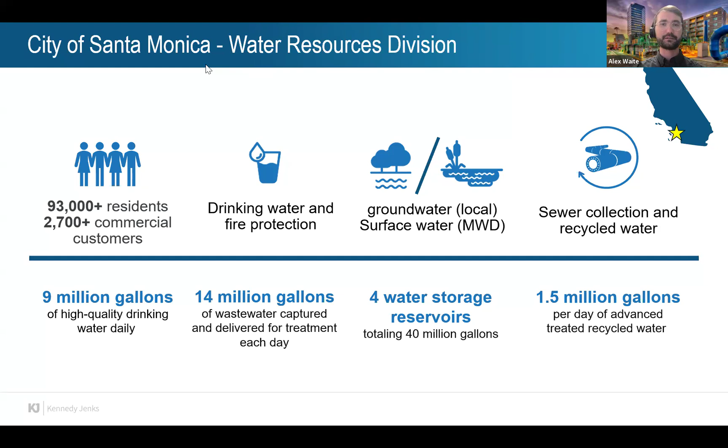The city of Santa Monica is a small coastal city about 9 square miles located in Southern California. We're surrounded on 3 sides by the city of Los Angeles and on the west side by the Pacific Ocean. The city serves about 93,000 residents, providing drinking water, wastewater, and recycled water services.

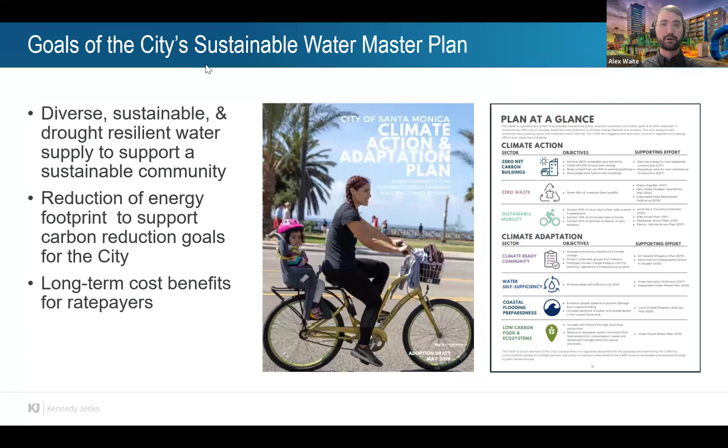Back in 2018, the city updated the Sustainable Water Master Plan to find ways for the city to become resilient and self-sufficient on local water supplies, and get off of imported and costly water supplies from the Colorado River and Northern California. Part of this master plan, we were able to identify ways to create a diverse and sustainable water supply to support the community of Santa Monica, reduce the energy footprint, and find long-term cost benefits for ratepayers.

For Santa Monica, we've been doing tertiary treatment on stormwater for non-potable sources, for unrestricted irrigation and indoor use. But now we've gone beyond that in some of the projects I'm talking about today to do groundwater replenishment. With regulations now complete in places like Colorado and California, we have drinking water regulations both for raw water augmentation and treated water augmentation. There are so many different pathways to utilize advanced treated recycled water for different applications, and that's what we were really investigating as part of this master plan: what's the best use for this water.

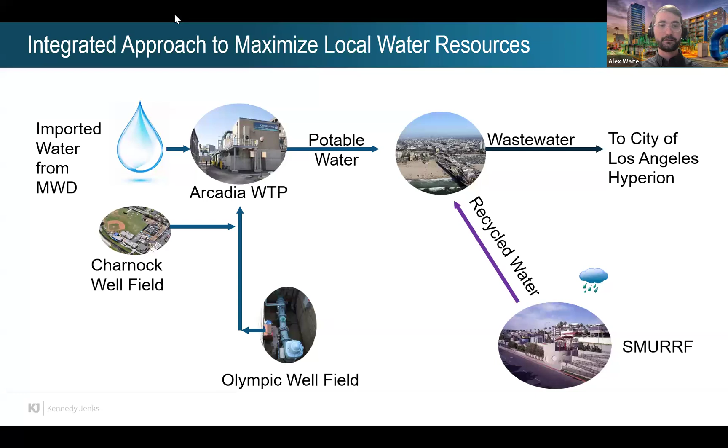As I mentioned, we did have a small amount of recycled water coming from our Santa Monica Urban Runoff Recycling Facility, or SMURRF. We also had local groundwater supplies from our 2 local well fields.

As part of the Sustainable Water Master Plan, we identified 3 different components of how the city could become self-sufficient on local water supplies. First and foremost is conservation, reducing the overall amount of potable water used. Component 2 is advanced treated recycled water, looking at how to utilize that water for both non-potable applications as well as for augmenting our local groundwater supply. Number 3 is how to become more efficient on our local groundwater supplies: remediating contaminated groundwater, as well as expanding the efficiency of our existing local groundwater treatment systems to produce more water from the same raw groundwater sources.

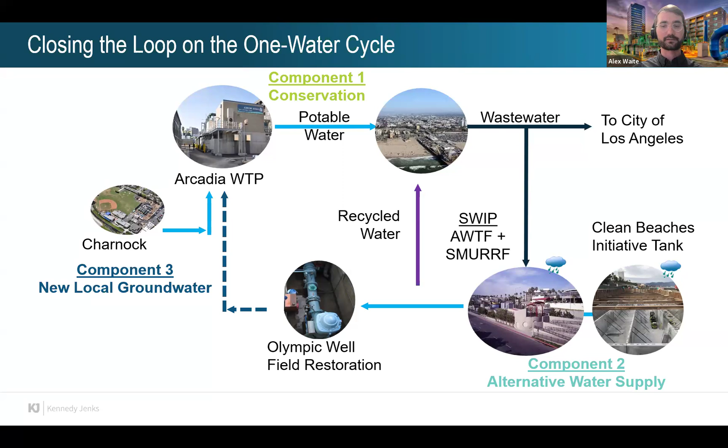On that second component, the alternative water supply, this is part of our sustainable water infrastructure projects. There were 2 facilities incorporated as part of this project: the advanced water treatment facility, as well as upgrades to the existing Santa Monica Urban Runoff Recycling Facility.

The AWTF is able to take 2 source waters: wastewater, as well as a blend of stormwater and urban runoff. Most of the time it can do 100% wastewater, and when there is stormwater available, it can take up to 30% of that stormwater supply. It runs that water through a full advanced treatment facility to bring it up to the Title 22 standards for the California Code of Regulations for groundwater augmentation.

For the SMURRF, it's able to take a blend of stormwater, urban runoff, as well as brackish groundwater, and runs it through an advanced treatment process consisting of reverse osmosis, creating what's called Title 22 diluent water under the California Code of Regulations. These 2 facilities together can produce 1.5 million gallons per day of advanced treated recycled water, both for irrigation, dual plumbing, as well as for groundwater recharge.

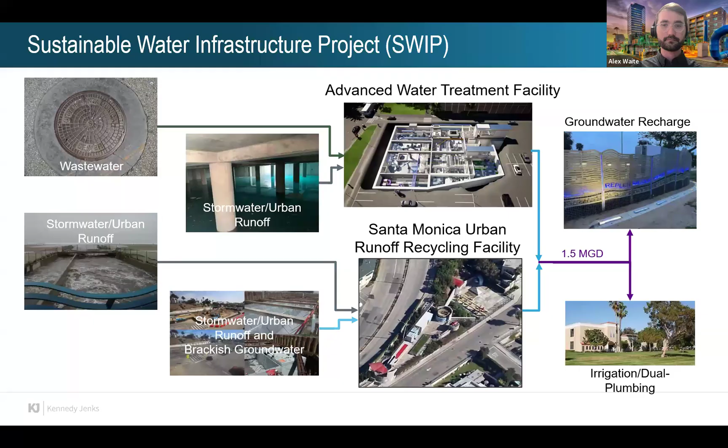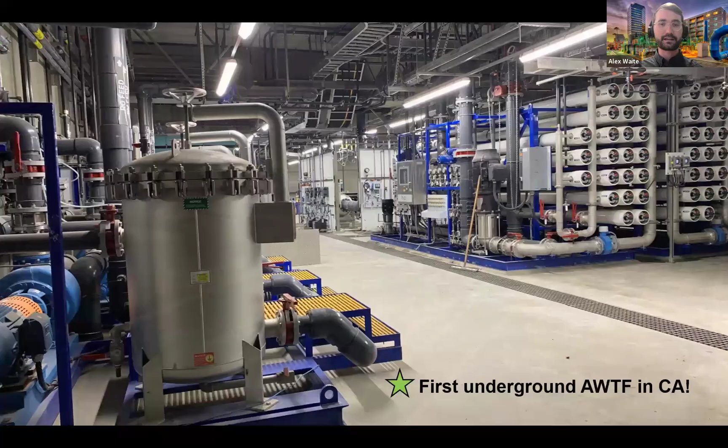But we ran into a challenge here with SWIP. We have the ability to create a lot of water, almost 1,700 acre feet per year of advanced treated recycled water supply. But our current use for non-potable is less than 100 acre feet per year currently. So we have a lot of supply left. So what do we do with all that supply? What are our options?

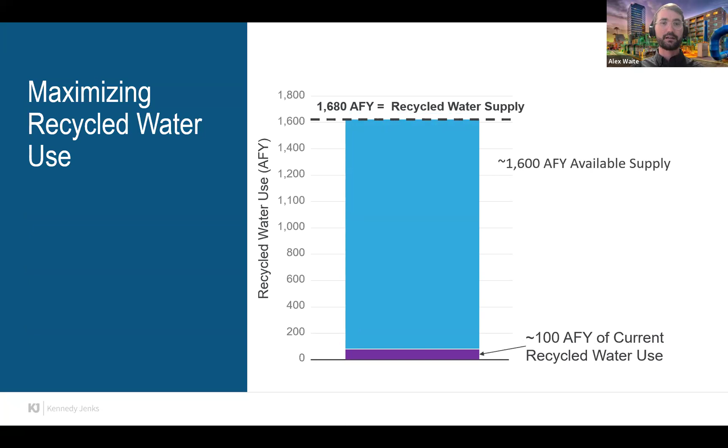Now there are additional administrative requirements for these non-potable systems. There's requirements for on-site supervisors, as well as additional documentation with LA County, as well as the Regional Water Quality Control Board and Division of Drinking Water. So the problem with this system is that new pipe equals more money. That's something we need to evaluate as part of this plan.

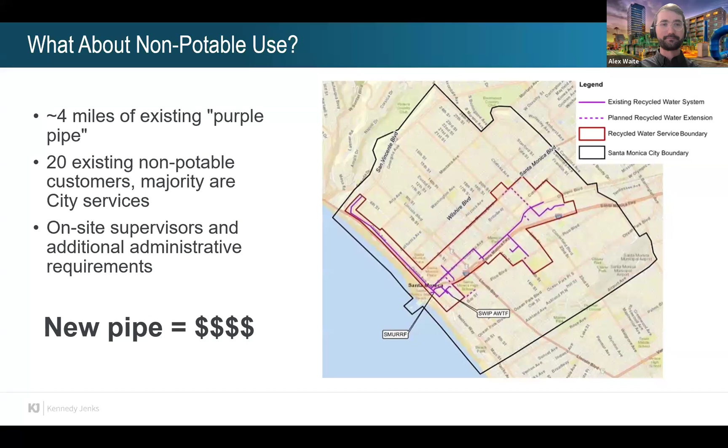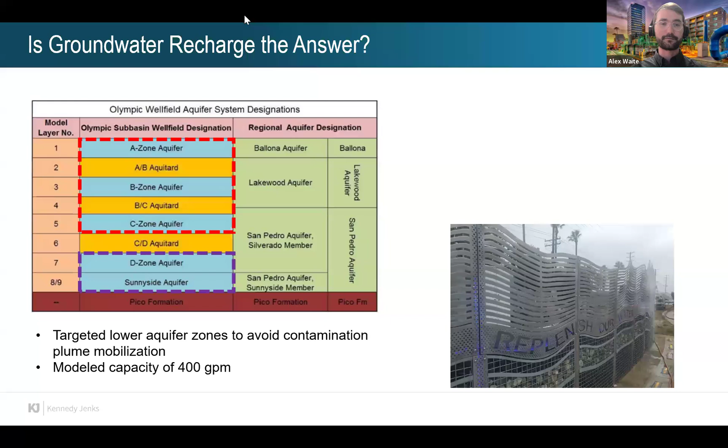In the modeling effort for this project, we modeled a capacity of 400 gallons per minute. Unfortunately, when we actually drilled the well and started doing injection testing, we found that the geology in this area actually creates a pinching effect. You can see it in the figure, where the aquifer zones are actually coming together towards the edge of the well field. This limited our available capacity in this area to about 200 GPM. Due to the separation requirements between a production well and a recharge well, we couldn't put the recharge wells any closer to the production wells. So that's a big challenge in order to put in more groundwater injection wells at this same capacity.

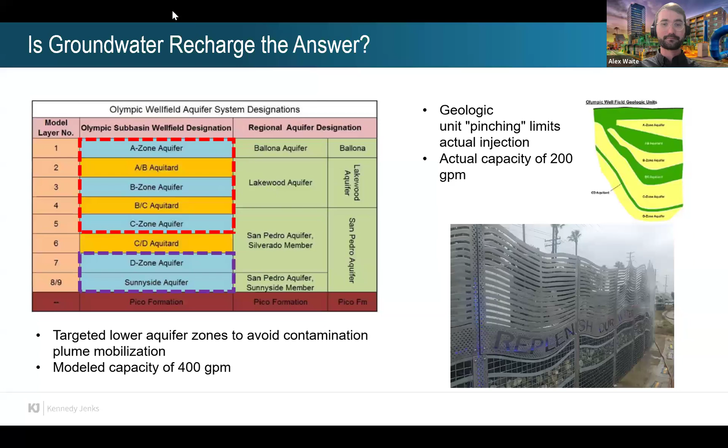So what does that mean? More money, right? Well, what about the last piece? What about direct potable reuse? Is that possible?

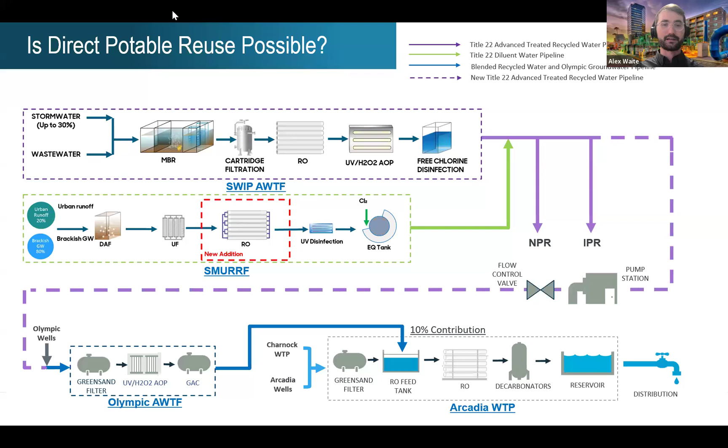So this is a schematic of a concept we've been working on in the city of Santa Monica of how to take all these pieces we have and put them together: the SWIP advanced water treatment facility, the SMURRF, also our drinking water system, so our new Olympic advanced water treatment facility, which consists of UVAOP and GAC, as well as our existing groundwater desalter facility, the Arcadia water treatment plant. Is there a way to put these pieces together with potentially a new pump station, maybe a flow control valve, perhaps additional treatment to meet the new DPR requirements that were approved by California in December of last year? So this is another opportunity we were looking at.

So why a master plan? Well, it's the plan for all these capital investments to utilize all the recycled water that's available, so no drops are wasted. Looking at that expansion of the non-potable system for those additional applications, expanding indirect potable reuse, seeing if the groundwater replenishment and more wells is feasible, and finally exploring the direct potable reuse opportunities.

So now I'm going to turn it over to Dawn to talk through the rest of the master plan effort.

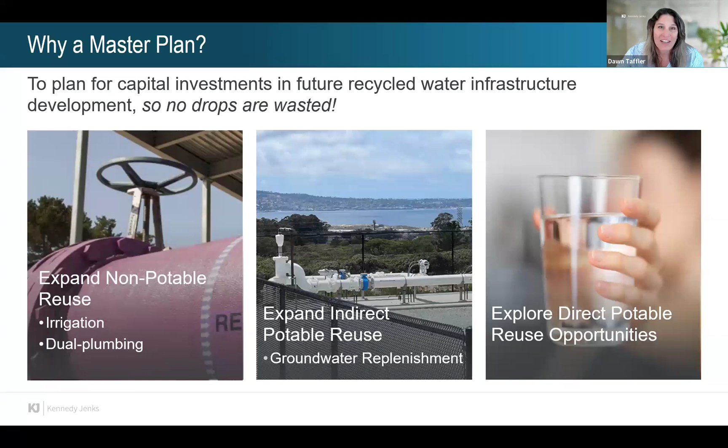Fantastic. Thanks, Alex. Alex really set the stage here of all the great work that the city has done. And it's a little bit different. Most master plans start out when cities and agencies don't have any infrastructure in place. They're starting to figure out what they're going to build so that they can start to meet these demands, or beneficially reuse their resource, or avoid discharging because of regulatory requirements. So this is a little backwards. It was a unique plan for us to work on in terms of recycled water master planning. So what this was really about was connecting the dots between the city's existing systems, the ones there, the ones under construction, and then the new facilities, all aimed at reducing the city's reliance on imported water supplies.

So as I started off saying, this is a roadmap to optimize the use of the city's resources in the best way, that 1,600 acre foot Alex mentioned, in a way that is cost effective, and also thinking about maybe some of the longer term regional opportunities.

So the overall approach is really a 4-step process. The first step sets the boundary conditions. You got to figure out really knowing what those available supplies are, not only on an annual basis, but if there's any variation, thinking about the reuse opportunities, the non-potable and potable, and what those demands are.

Then you got to think about the customers. Who is going to be the customers that we're really going to target? Where are we going to send this new conveyance? What's the best bang for our buck in sending it out there to meet the demands? Who are the priority customers? And then that comes back into cost effectiveness.

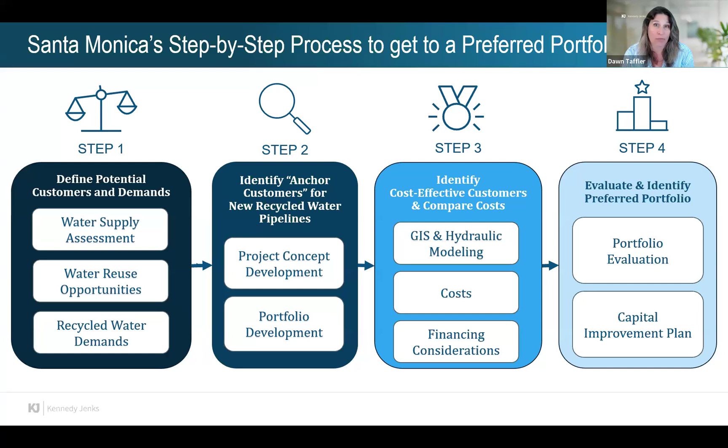And then finally, the last step was evaluating projects, putting together portfolios. There's not a lot of low-hanging fruit out there anymore. There's no one option that does everything. So it's really about looking at the best diversified portfolio supply and then creating a capital improvement plan so that the city can budget, seek grants and funding, and then have a plan to design and construct facilities.

So let's dive into the details of step one, defining potential customers and demands. So you saw that the map Alex first presented, that was the baseline system. Purple pipe in the middle is the existing system. The blue dots here show all the potential customers in the city for non-potable reuse.

A market assessment is basically just looking at, well, what's the market? Who can we sell this water to? And we really did this market assessment in two parts. This first part was this non-potable approach, looking at who would use the water for irrigation of landscapes, parks, maybe a golf course, a cemetery, but also dual plumbing for indoor use.

The city is really committed to reducing water demands into the future. And so new developments are being asked to do dual plumbing, which means a separate set of pipes inside the buildings to allow non-potable recycled water for flushing toilets and other non-potable uses. So that's only for future customers.

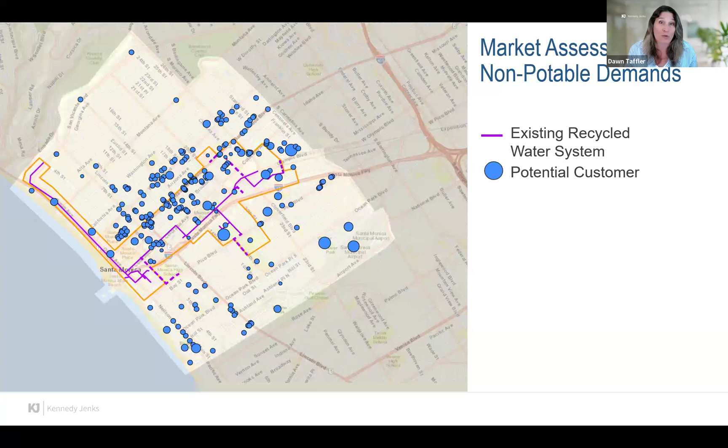So these blue dots represent all of those together. So there's a lot of dots. They're spread all over the place. I'm sure all of you are going back to that number of like, oh, that's a lot of cost if you're going to connect every single customer. So first we wanted to look at what are those demands so we could start to think about what are the best customers to connect.

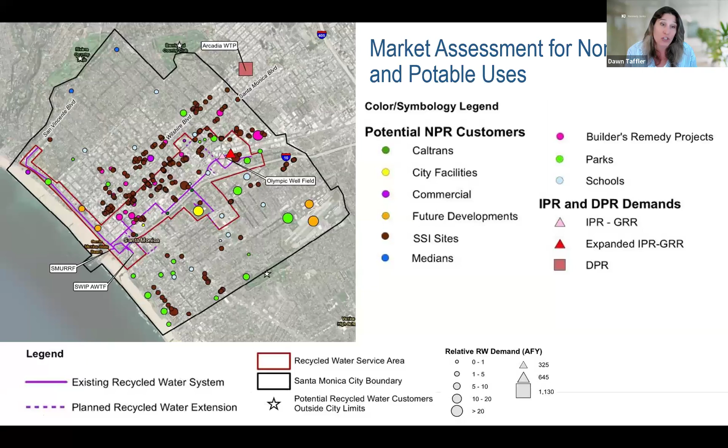And then direct potable reuse is just outside of the city boundaries. I know it's a small label there, but it's a big pinkish box that says Arcadia Water Treatment Plant. That's where the city already treats some groundwater coming out of their basin, and that is where the direct potable reuse water would be blended in. And then it could be distributed to all the customers that are connected to the city's potable water system.

So this is a figure that's showing all of the different potential demands. And what we're trying to see is, well, if we served everyone, do we have enough supply? And as the title indicates, this really revealed that the city is supply limited.

But just to walk through it a little, the gray bars at the bottom are the current customers. As Alex showed in that first slide, there's some customers hooked up receiving the water from the SMURRF, the stormwater project, but it's a very small demand, right? These are shown in monthly acre foot per month values. We started to add on top of that all of the different demands, starting with non-potable reuse.

The existing customers are parks that are already using water that we could just convert. The future customers include future developments, their irrigation, their dual plumbing. And then you get into the green bars, which are the groundwater replenishment, both the initial wells the city is planning, but also the potential to expand, and then direct potable reuse demands.

Now, the horizontal red line is important here because this is the maximum supply capacity the city will have when running all their new facilities at full capacity. That's 1,600 acre-feet a year, which Alex pointed to. We'll keep coming back to that.

And as is very clear, if you try to serve all of these demands, you're not going to have enough supply. You're going to have to figure out who gets what water, and there's no point in building a bunch of infrastructure they can't serve. So this really indicated the need to identify the best portfolio of customers, because you're not going to connect every single blue dot in the picture.

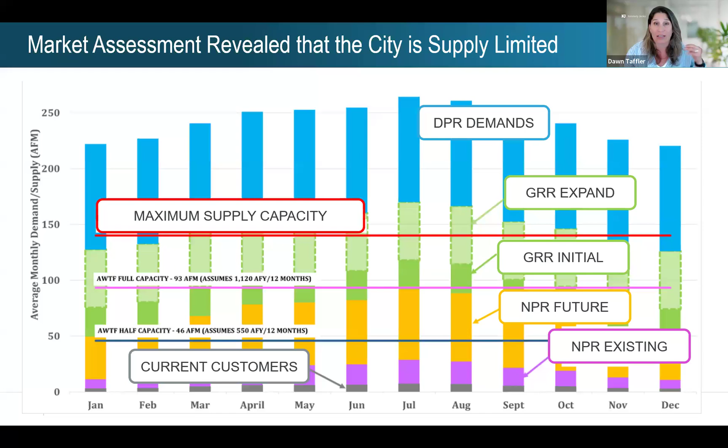So this leads into step two, getting into anchor customers. What's an anchor customer? An anchor customer is really the customer that's going to have the biggest priority. It's the biggest bang for your buck, maybe, or it's the most visible customer. So what the city really wanted to do is prioritize customers that are important to the city. Most of those were either parks and green spaces, shown by the green dots, or some of the bigger future developments.

There's one future development on the southeast side of the city at the Santa Monica Airport, which is going to go through a redevelopment phase in the next couple of decades. That's going to be an opportunity to create more demands and develop that park sustainably. So they wanted to think about it in the future, planning in a way that helps meet their other goals. These anchor customers really help define the geographic direction of expansion.

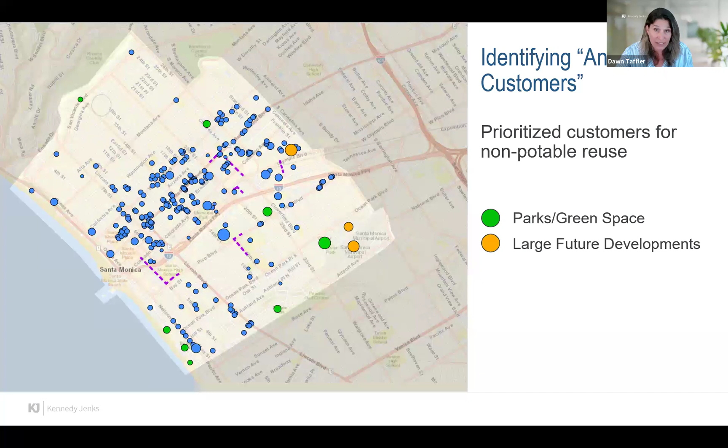So when we started to look at these anchor customers, we grouped them into different areas. Using a simple ABCD system, you can see there were five proposed backbone extensions, meaning the bigger pipe. The intent is to deliver water to these priority sites, and then think about what smaller customers we can serve along the way.

So we had a center, A, in the center of the city, which is where a lot of the new future developments would be. B is out where that airport is, with a few big parks. C is the lovely Santa Monica coastline, with some nice parks there. If you ever come visit the city, I highly recommend it.

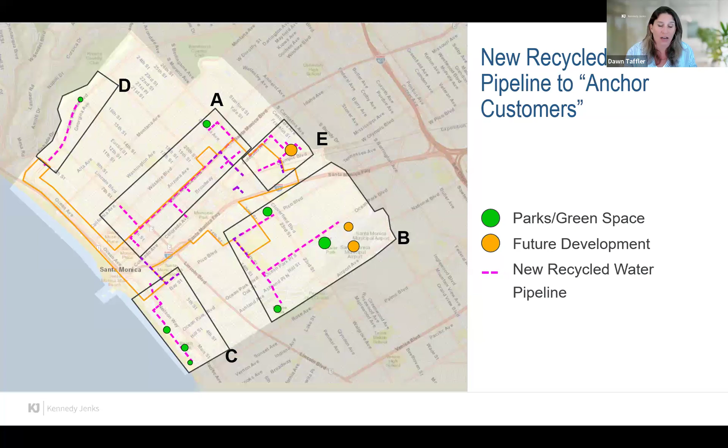D is a median used by a lot of city residents for running and biking along the path, so there's a small demand out there that the city was interested in serving. And then E is another big development that could come in the future with some demands.

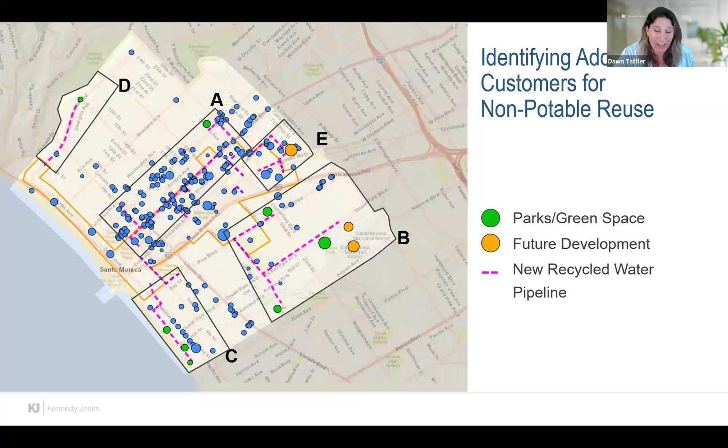So here's all the blue dots and how they fill into those areas. You can see A has a lot more potential for future buildings that will use recycled water, with less development in the outskirts. But all of this was taken into consideration, which really led to the need for a transparent, more quantitative approach to figure out how to decide what customers to connect.

So here we get into the radius of cost effectiveness approach, which we used to compare costs. Radius of cost effectiveness is essentially a way to quantify the distance at which a potential customer can be cost-effectively connected to a recycled water pipeline. It's a relative comparison looking at key parameters, using an equation focused on the customer's demand, since more demand is going to be a greater benefit to beneficial reuse.

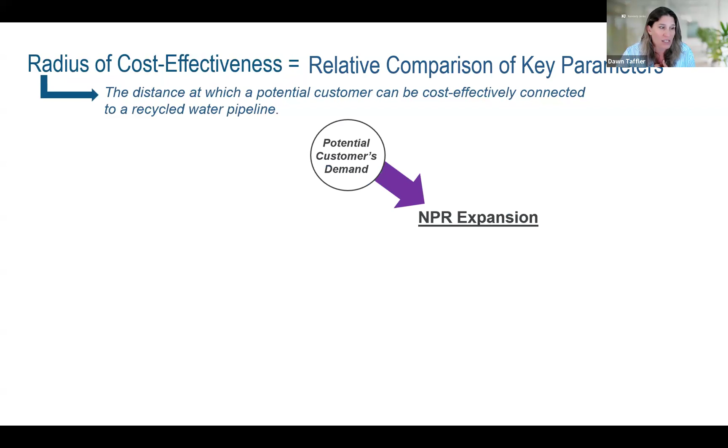We compared non-potable reuse expansion and DPR delivery. The idea is, does it make more sense to connect this customer with a purple pipeline that serves non-potable water specifically for non-potable reuse? Or does it make more sense to send that water to the direct potable reuse system, where it would get there eventually after going up to the Arcadia treatment plant and coming back into the drinking water distribution system?

So this is very unique. Not most cities would have the opportunity to look at these two different ways of serving a customer, and it is the same water, both of them very high quality.

So we compared a cost comparison. We looked at the demand and what the dollar per acre foot cost would be to send that water through direct potable reuse. There's some infrastructure associated with that, and then how it's delivered.

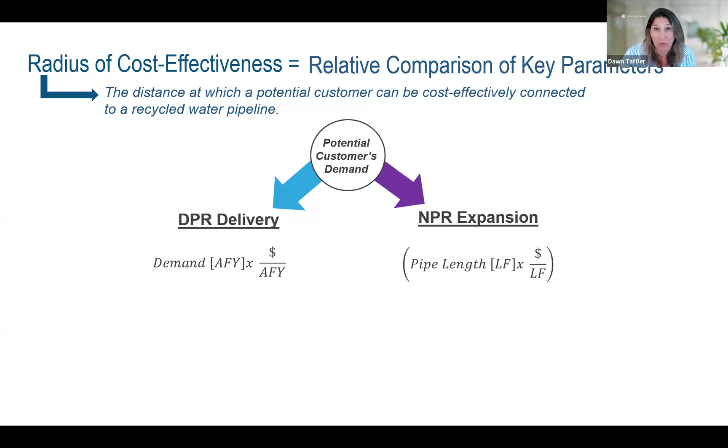And we compared that with the cost of a new pipeline to connect that customer to the non-potable irrigation system, to one of the backbones that we identified as part of the customer prioritization. So the pipeline length ended up being the radius that we looked at to see how far that customer is from a backbone, which would indicate whether that customer is cost effective.

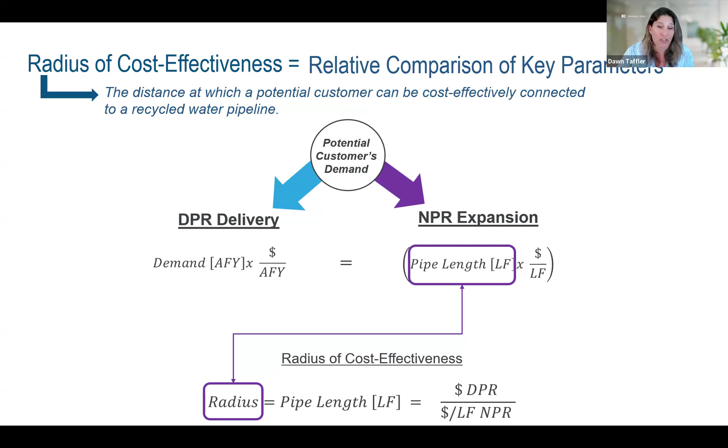We did the equations for each of these to look at whether or not the radius of cost effectiveness would come into contact with the nearest transmission pipeline, backbone pipeline, or existing pipeline.

It would be more cost effective to serve that customer through potable reuse through a DPR project. Customer B, on the other hand, was a larger demand customer, and it was also nearer to one of the extensions. I think this was extension B.

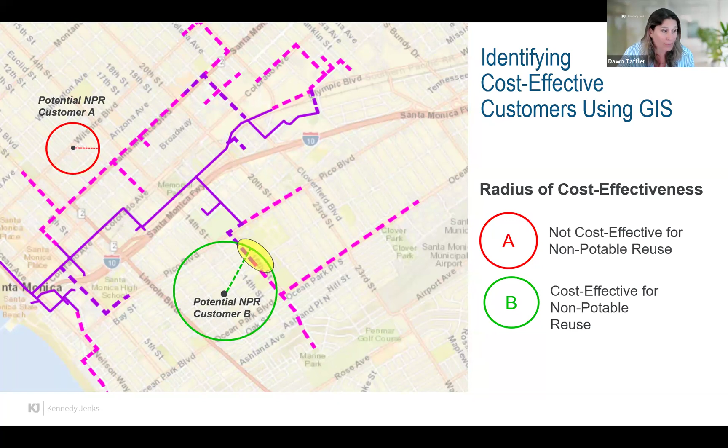Well, non-potable reuse for dual plumbing has a relatively small demand. I mean, it's flushing toilets. It's not the kind of thirst that our grass has for water. So a lot of those customers were relatively small demand, small circle, and therefore they don't intersect with a planned transmission pipeline, and therefore they're not cost effective.

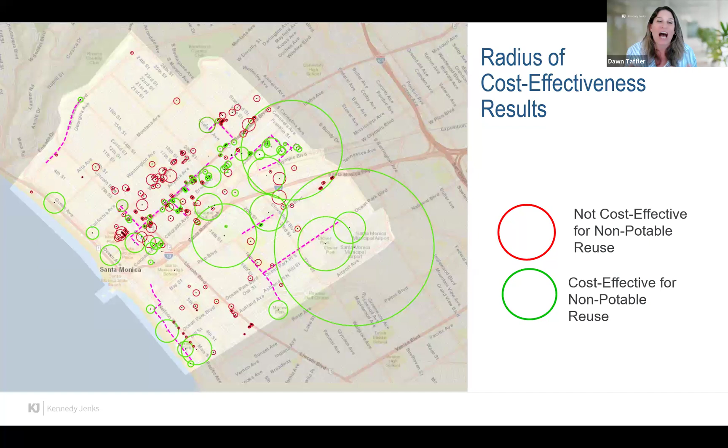So now you can start to see, oh, if I gave this to my 6-year-old kid and said, connect the green circles, you'd start to draw those lines and you'd start to be able to see how we would find a cost effective recycled water expansion system.

So now that we started to do all this, of course, still an iterative process, going back and forth, we were like, okay, well, how are we going to really compare different portfolios? First, we looked at the non-potable reuse projects, just looking at those 5 backbone areas, A through E.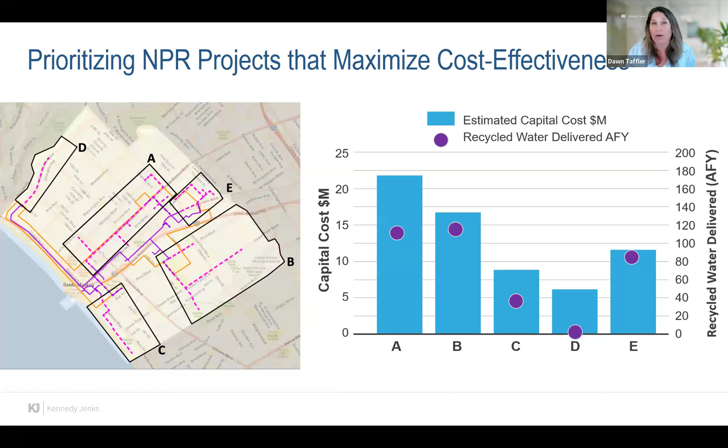A good way to look at this is the annualized capital cost, which takes the capital cost and uses an interest rate and facility lifetime to determine the dollar per acre foot cost over the project's life. Now the bars really tilt. A was the most expensive, but because it has the greatest demand, it actually has one of the lower dollar per acre foot costs. Versus D, that isolated pipeline on the west side, serving such a small demand, it's actually the highest capital cost of service. So cost effectiveness says we want to serve that median, but we have to recognize that's going to be the highest cost to serve.

That's okay if that's still a priority of the city, but we wanted to help the city go through that process and discuss this with their community.

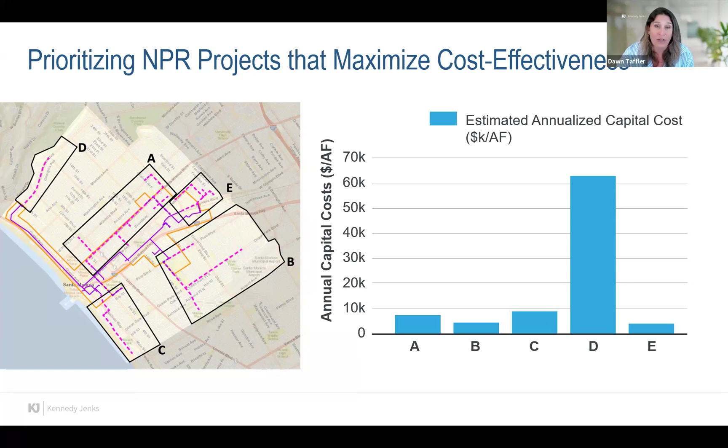Now we know we have certain areas we want to focus on, and we have a way to figure out which smaller customers connect. How do we create the best portfolio to use that 1,600 acre feet in the smartest way?

We looked at different portfolio concepts. The first one was about maximizing non-potable reuse and maximizing groundwater replenishment. But if you do that, there's no DPR - there's no water left. Those were the bottom bars in the chart, and you hit that red line, meaning we're just not going to do DPR. Maybe that's better - maybe we're not ready for DPR.

Portfolio concepts 2 and 3 were like, okay, maybe we prioritize some NPR, do as much groundwater replenishment, and maybe do some DPR - start to put our toe in the water there, and maybe that's a good idea.

Portfolio concepts 4 and 5 start saying, what if we do more potable reuse? Portfolio concept 5 is like, maybe we should really balance groundwater replenishment and DPR together while hitting those priority customers, because we think that's the best diversification and visibility.

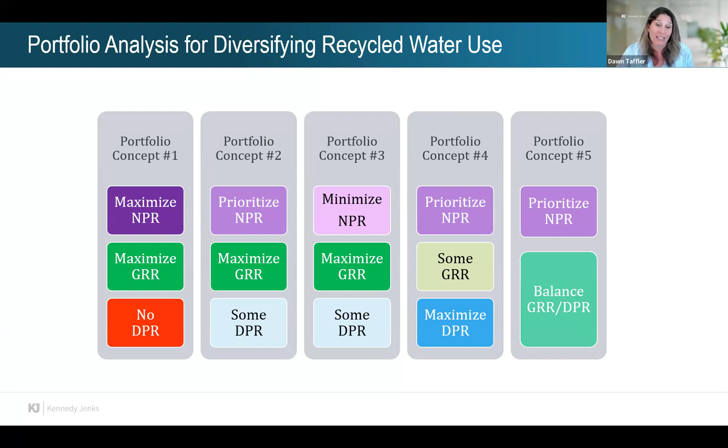This was an iterative process with city leadership. We worked with their sustainability group, wanting to make sure this would be supported by the community, and that helped us take the next step of evaluation of cost.

This is the same approach I talked about in the backbone, looking at each portfolio - and there are sub-portfolios for each of these. So there's portfolios 1 through 5, and sub-alternatives, again looking at cost. The key here is: if they maximize NPR, the non-potable reuse irrigation system, trying to connect as many customers as possible, no surprise, that's the most expensive - that's the first bar. But if they maximize groundwater replenishment and DPR, doing more potable reuse, that requires less infrastructure - those had the lowest annual unit cost.

So we started to look at this - how are we going to use these planning level costs and annualized costs to figure out the best path for the city?

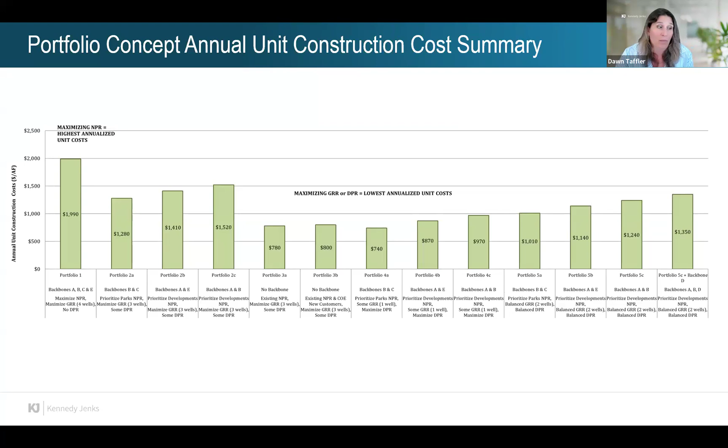Based on this analysis, the city said, well, based on our values, our customers, our visibility, our innovation, we've got this high quality water. We really want to do a preferred portfolio that balances all these different types of reuse.

Backbone A was very important because it expanded reuse in this main city corridor where a lot of new buildings are coming in that they want to promote dual plumbing. They also wanted to prioritize Backbone B because that airport redevelopment was going to be really important to the future - a really beautiful new development that they wanted done in a sustainable way.

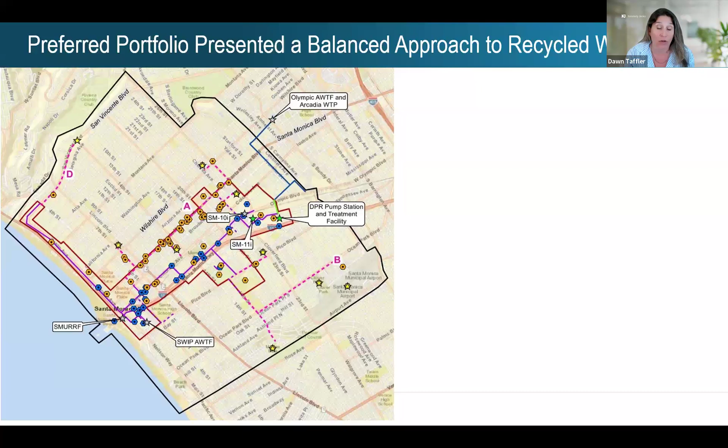And then Backbone D, the expensive one on the west side - despite it being the least cost effective, that city median provides high community value and good visibility. We really wanted to press the notion that numbers don't make the decisions, people do.

Portfolio 5 is really a selective build out of non-potable reuse with a balanced portfolio of DPR and groundwater replenishment. If your financial portfolio looks like this, that's probably a good idea. So you can see those same kind of thought processes go into master planning for recycled water.

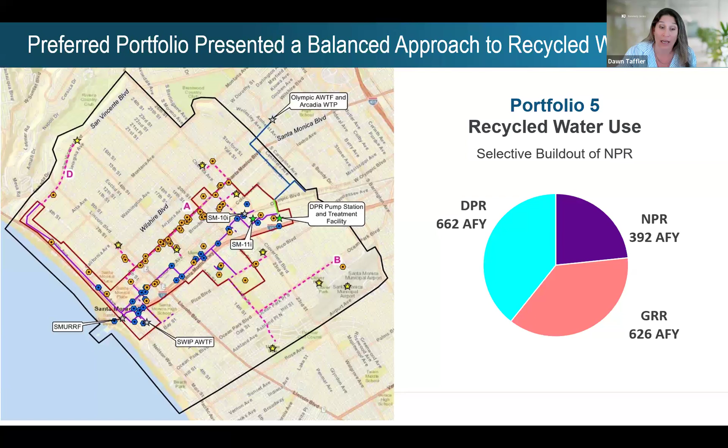So looking at the cost for the preferred portfolio, on the left is the capital cost, where you can see that the dots represent each of the demands for recycled water delivered for non-potable, groundwater, and direct potable reuse. Then we looked at the annualized capital cost, which is the light green at the bottom, and the annual unit O&M cost. So we dug a little deeper into the preferred portfolio to fully understand what it's going to cost on an operational basis, dollar per year cost to run this project.

You can see here that the annual unit cost to deliver recycled water for this diversified portfolio is just under $4,000 an acre foot, which may seem like a high cost for delivering this, but let's keep in mind, if you're in California, the cost of imported water is very expensive now and getting more expensive in the future. So we do a lot of these studies and we look at how the cost of imported water is going to increase over the years.

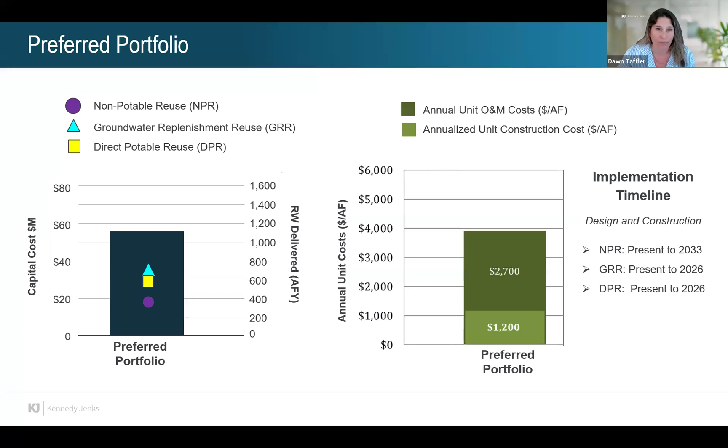And there is going to be a pivotal point where the return on investment is going to benefit for the city in the long run. The city also wants to think about, well, if we're really constrained on this water supply, the amount of recycled water we can personally produce, maybe we should think about regional opportunities. Regional opportunities are a really good way to identify opportunities for shared infrastructure, repurpose assets that maybe aren't being used anymore, and realize economy of scales. You know, bigger bang for your buck, you're going to get better economics.

So this often involves a holistic view of multiple regional water resources and integrating each piece of the water cycle to realize multiple benefits, thinking about the best water for the best use. And so the city has been in discussions with neighboring water and wastewater agencies to discuss these possibilities.

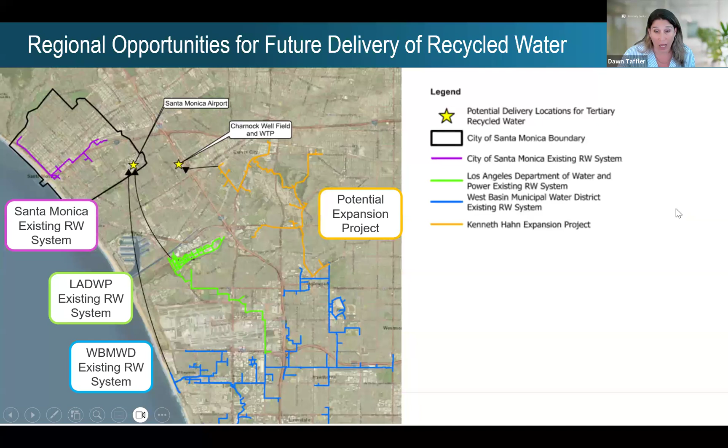So I'll hand it back over to Alex to talk financials.

All right, yeah, thank you, Dawn. So I want to close out here looking at the financial impact of doing these projects. As a public agency, we have a fiscal responsibility to our ratepayers to find the most sustainable and cost-effective practices to implement these projects. And so we want to look at what are our current rates for recycled water and how does that compare to our potable water rates. And if we were to implement the preferred portfolio, what impact would that have on our ratepayers?

So here's a slide showing the recycled water rates on a dollar per 100 cubic feet basis for many different agencies throughout California, trying to do that side-by-side comparison of our rates, are they at the right level compared to where some of our member or other agencies are at. And so you can see here at the bottom, City of Santa Monica, right now we're at $3.49 per 100 cubic feet. There's several agencies that have a higher dollar per HCF and a lower HCF, so we're kind of right in the middle.

So why do we have that disparity? Well, we're trying to recover costs through the sale of recycled water, but we also want to incentivize the use of recycled water supplies. So in some areas of the city, it is actually mandatory to use recycled water for new development, but there's other areas where it's not required. Although we have identified where we want to expand the backbone, we also want to encourage developers to use recycled water to limit the use of potable water for things that don't really require it.

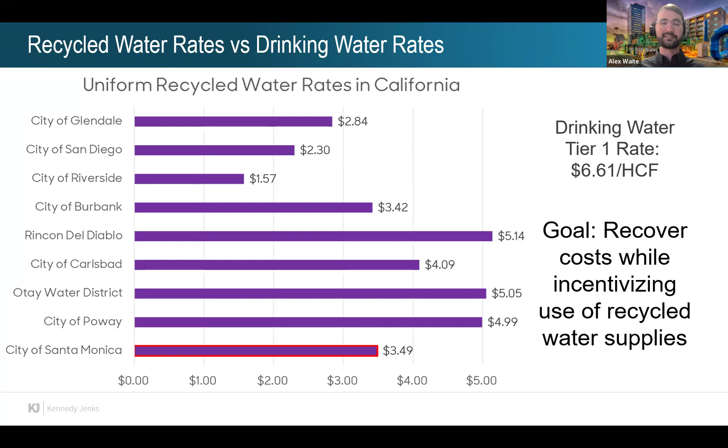But the challenge is as you have a lower recycled water sale versus drinking water, it actually impacts our ratepayers even further. So this is a cost allocation chart looking at that preferred portfolio that Dawn was showing. We're looking at the non-potable reuse applications, the groundwater recharge applications, and direct potable reuse with the cost based off of the sales of the recycled water.

What we see here in the direct costs, these are an annualized direct cost over a 30-year period, as well as the administrative costs for the city to actually implement these projects. The column shown in red is the avoided costs from the sale of recycled water, essentially money we're making up by selling this water, but it's also avoidance of the wastewater that is sent to the City of Los Angeles' Hyperion Water Reclamation Plant. So we actually pay Hyperion to take our wastewater, so any wastewater we don't send down the pipeline, we can actually save that money.

What we see here from the non-potable side, since our recycled water sales are so low compared to the actual cost to implement this program, it will have an impact on our ratepayers of about $2.7 million on an annual basis. Same thing with the groundwater recharge side. Now, in this case, we can actually sell that water eventually as drinking water because we're augmenting our groundwater supply. So the avoided costs are a little bit higher here, but it still will be an impact on our ratepayers, about $320,000 per year.

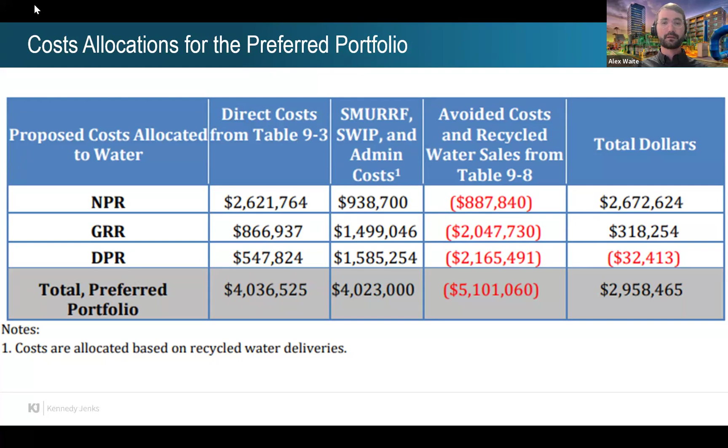All right, so finally, I want to close with our key takeaways and our next steps.

So key takeaways here, first and foremost, is this was really interesting to find out that we were actually supply limited in our advanced treated recycled water. We thought we had all this water, but then you look at all these different options and maximizing the use over every single one, and it's actually not feasible based off the amount of water that we produce. So now we need to be a little bit more selective about how we're using that water.

And so we looked at those selective non-potable reuse projects that are key to growing the sustainability of Santa Monica as a whole. And then finally is diversifying that recycled water use, finding the most sustainable practices as well as the most cost-effective to create a full supply portfolio to utilize all available water that we're able to produce.

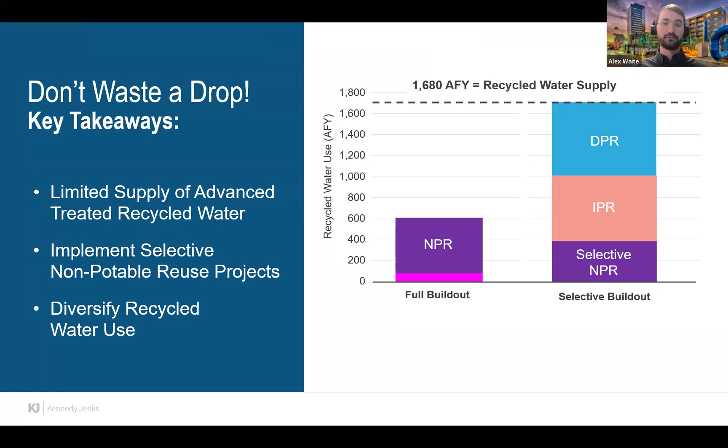And so what are those next steps? Well, we're looking at expanding pipelines to key customers. We have several projects ongoing right now in design and will be going to construction soon to further expand the purple pipe system.

We're also in the process of constructing one new groundwater recharge well that will be of relatively the same capacity as our existing well, and also in the design for a third well.

And then finally, we are kicking off a feasibility analysis to further investigate direct potable reuse in what we're calling our One Water Master Plan that should be kicking off around next month. And that's actually partially funded through the U.S. Bureau of Reclamation, and hoping to have that finished by the end of next year.

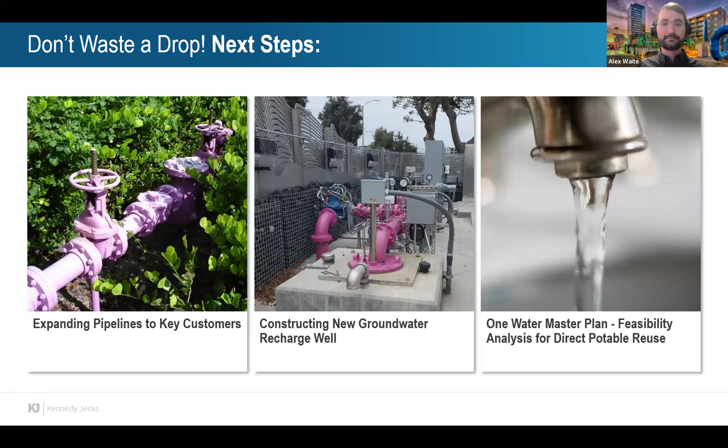So very exciting work that we have going on here. And we appreciate all your time, and we're happy to take any questions.

Fantastic. Dawn, Alex, thank you so much. That was awesome, that was awesome. What I might suggest, maybe if we pull a slide down, because then people can see our smiling faces a little bit more. This is great.